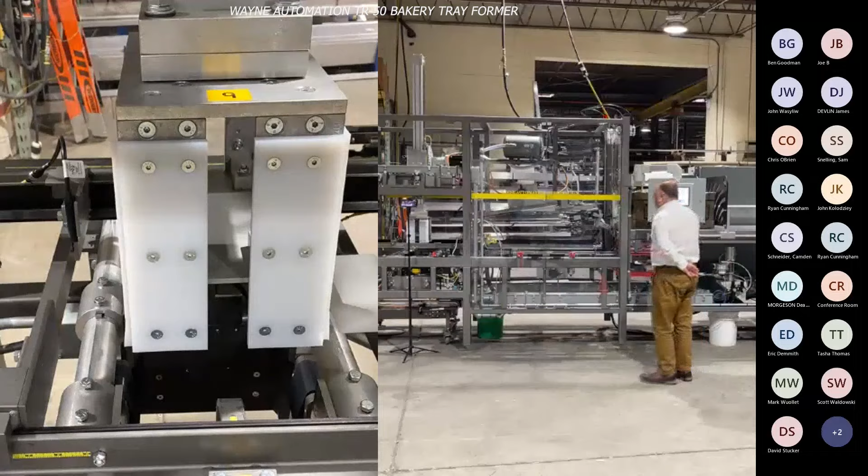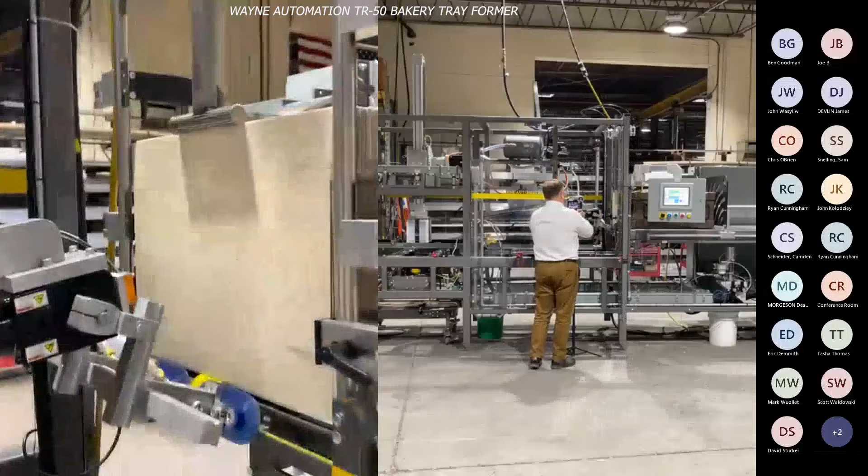Now let me stop for a minute and go through some more details of the machine. I'll talk you through the mechanics, then we'll get into the running operation a little more, and after that we can give you a static tour of the electricals and aspects like that. You'll see me moving my view around so you get a better understanding of the equipment.

To the side here that I'm pointing by the HMI is the magazine for the equipment. The magazine holds about 8 feet of blank stacked behind a pressure plate. I'll move over so we can see that in a little more detail.

So here is our magazine. This magazine indexes paper forward with each successive pick, and this pressure plate walks along with the paper on the afterward belt that the paper sits on. As we go to pick the paper, it comes to the front side of the magazine inside the machine, and you see the paper presented to the front magazine gate.

The static gates sense for the paper size and are picked by our servo linear and rotational pick system. This mechanism both travels in a linear fashion as well as a rotation to give a good, reliable pick of the paper and present it to the rest of the machine.

After we pick, we deliver it to our transport section. We have a servo linear transporter that will push the paper past the glue heads under these yellow rollers so that we can apply our adhesive precisely and accurately. With the dual adhesive we are applying here, precision is of the utmost importance - precision of the hot melt stripe, precision of the cold glue stripe - so that there is no squeeze out beyond the targeted areas, so that we have a good adhesive bond to allow that tray to survive in the oven.

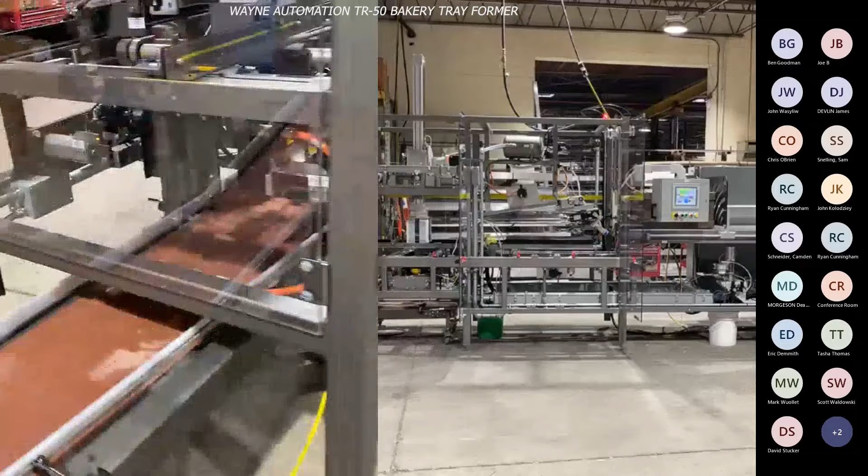When that's completed, we discharge out of the end of the machine onto our powered conveyor belt, taking the tray away up to your next activity.

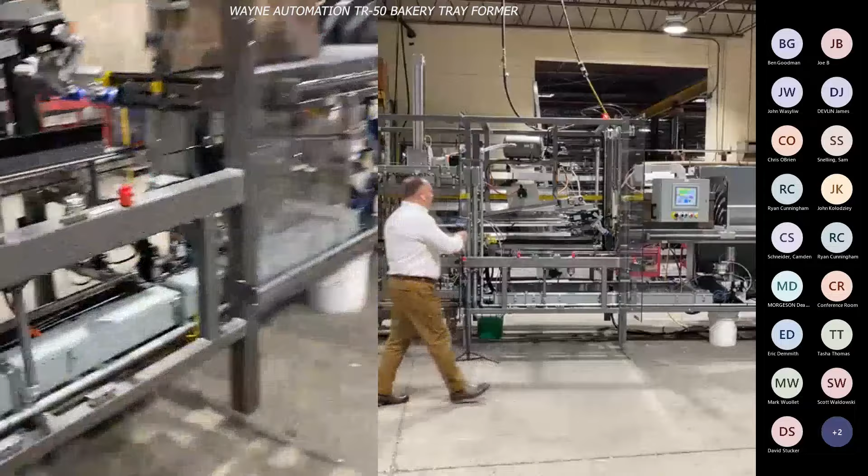I'm going to start the machine back up, and I'll just move through these various functions of the machine again so that we can see and watch what is happening.

Now, you see me running with the guard doors open. We've disabled some of those safety features for today for clarity of view while we're here demonstrating in our shop. Obviously, in any installed environment, that would not happen.

I'm going to re-energize the machine and reset. Our vacuum pump turns on, our hot melt adhesive system turns on, and we can begin producing.

Now here, for clarity of the demonstration, we are picking and operating at 15 trays per minute. Microsoft Teams doesn't have a frame rate that supports a very high-speed demo, so for clarity, we are running it very slowly for your viewing. We'll do a little speed demonstration a little bit later on.

So here you see our pick mechanism picking and taking the blank from the magazine. Now you see that blank being delivered to our servo linear transporter. We deliver the blank between our guide rails, and our servo transporter pusher escorts the paper in and past the glue head.

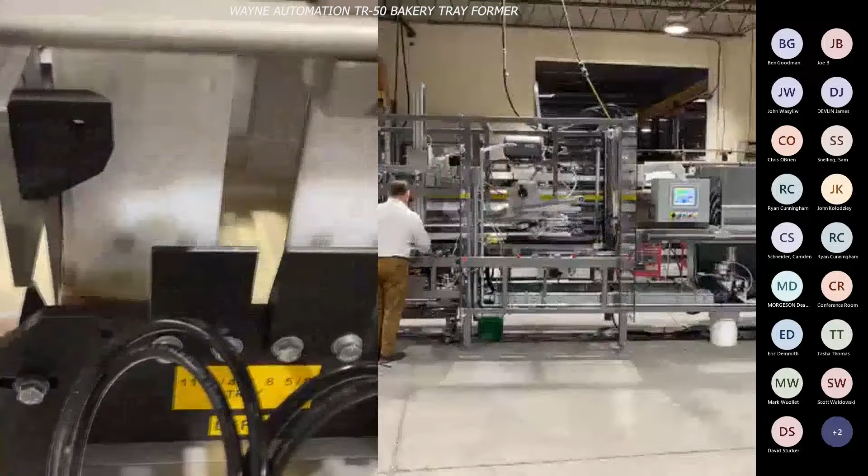I'll now slide around to the end where you can see the discharge. So trays drop down out of the forming section and onto our conveyor.

Jay, stay put for a second. It was kind of pixelated at the exit. Sure thing, I will stay right there.

Hopefully that's cleared up a little bit. Yeah, okay, a little bit better. I think it's clear enough, though.

Now, to show you a little bit better what that cold adhesive application and hot melt adhesive application looks like, I'm going to stop the machine through an e-stop at the forming section here, so you can see what a delivered tray looks like as it comes into the forming to see the glue stripes that are applied.

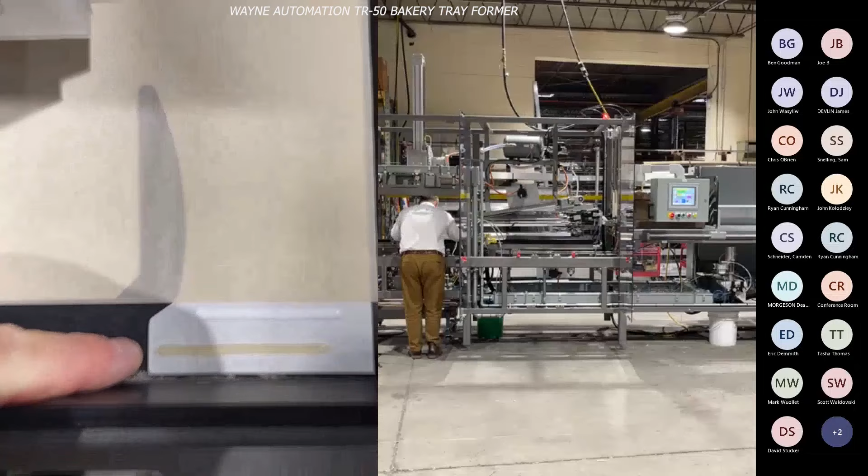So I've now initiated an e-stop of the machine. With this purpose, now I can get in nice and close and show you a tray delivered to the forming section. Here you see the hot melt adhesive stripe and the cold set adhesive inboard. The hot melt is there, again, purely to hold the tray formed until the cold set adhesive fully cures. And there you can see it as well on the downstream stripe.

Looking across to the other side of the piece of paper, you can see the same on the far side.

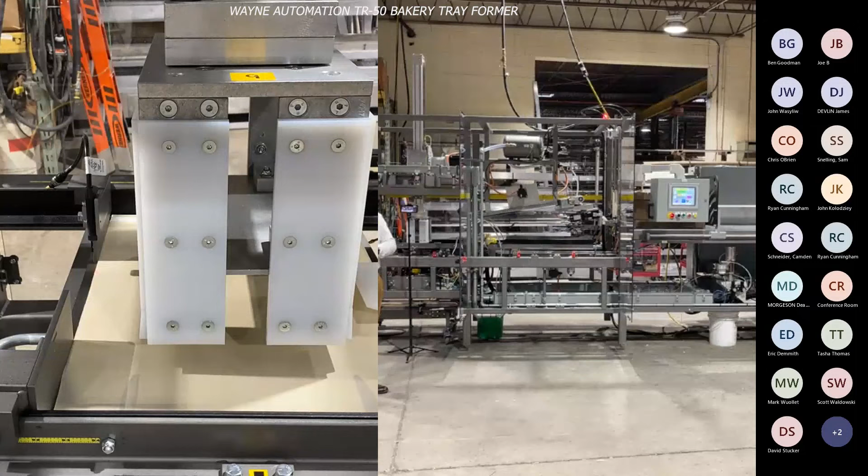Now, to achieve the precision we need at the production rates required for this machine, we have a Valco hot melt adhesive and Valco cold adhesive dispense system, all fired with a solenoid actuated, electrically opened, electrically closed gun. Those guns are fired off of the servo position of our transporter, giving us extreme accuracy, consistency, and repeatability in the placement of our adhesive, so that every tray comes out formed, ready, bonded, ready for transit into your oven.

I'm going to take a moment now and just give you an overall tour around the machine and show you some more details.

So starting at the magazine end of the machine, and I might disappear out of the overall view, but I am down at the magazine end.

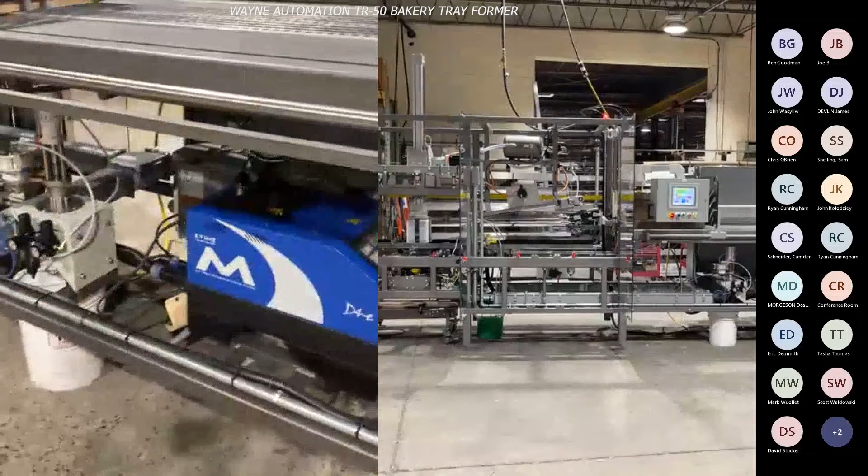What you see underneath the magazine is our Valco Melton hot melt adhesive tank system. This is a gear pump driven system for heating the Bostik adhesive at a very low relative temperature. We keep that tank at about 275 degrees. Low adhesive temp makes the product handle extremely well and provides extreme durability in the storage of that material.

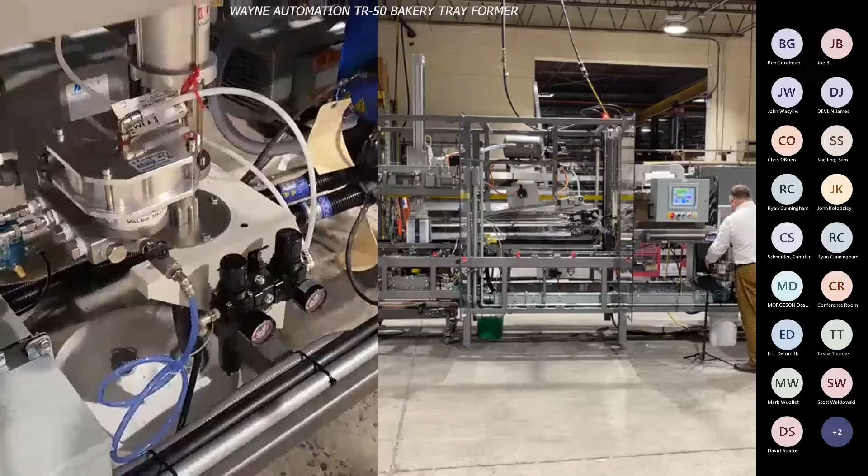Next to the hot melt adhesive pump is our cold adhesive dispense system, also a Valco Melton system. This cold adhesive pump system is pulling cold set adhesive from a pump bucket down below that you can see here. We're using a 5-gallon pail for this demonstration. That could easily be put into a 55-gallon drum of adhesive or a 500-gallon Gaylord, whatever suits your operational needs.

As we walk further down the machine, the operator screen, I'll spend a moment here touching on that and showing you what that operator station looks like.

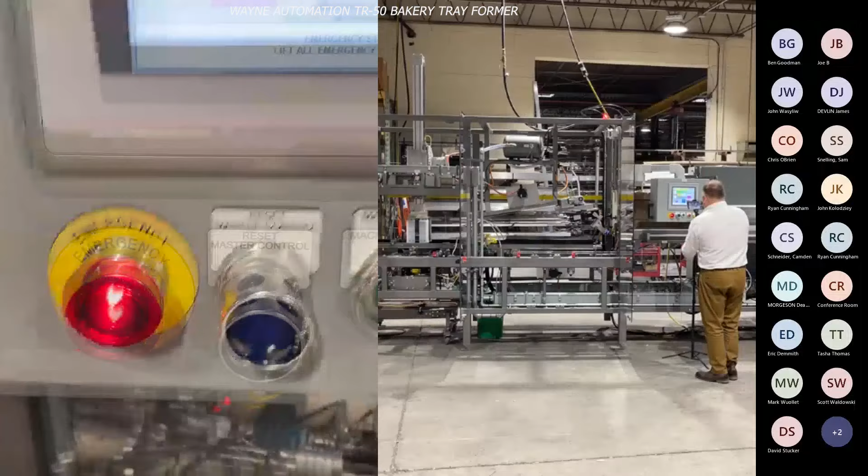The HMI is an Allen Bradley PanelView 10-inch HMI. I think I've got a good view there. Ben, is that coming across reasonably clear? Yeah, it is. Good.

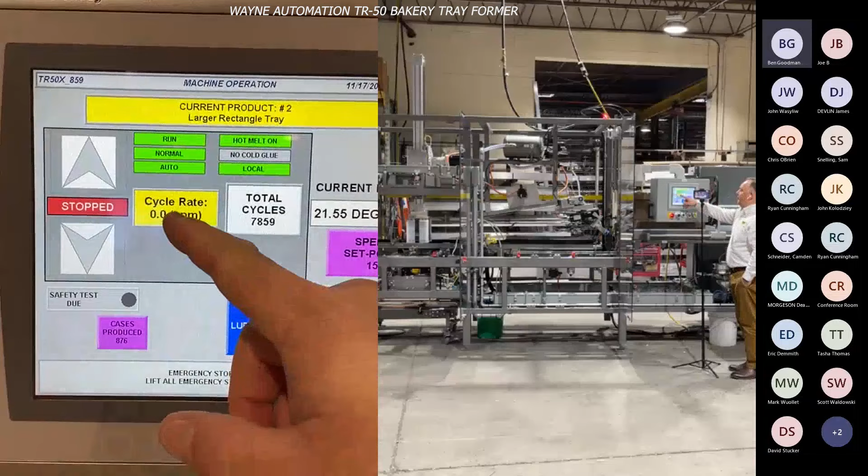The HMI shows the current set speed of the machine and then its current operating speed. In green or gray are the run modes of the machine. When all are green, the machine is ready to go into full production. When any one of these modes is grayed out, it's a non-production mode. You'll notice for the moment I turned the cold glue off, just so we don't have an alarm that goes off that warns you the cold glue is sitting. I'll go into that in a little more detail in a moment.

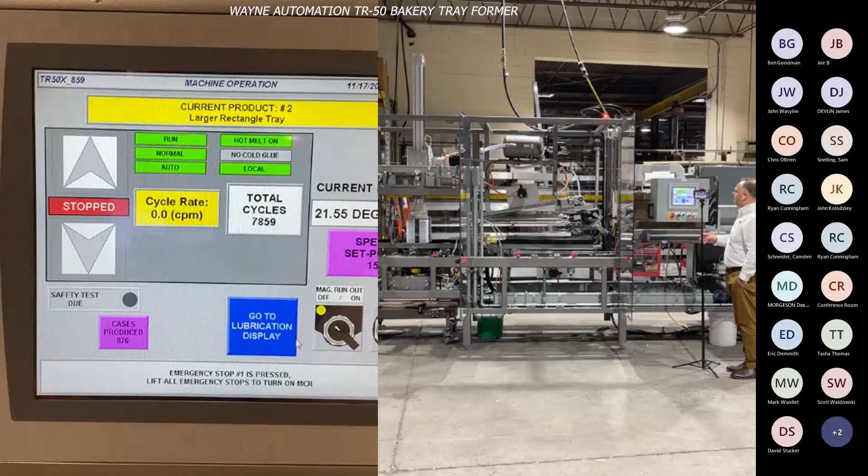We have the speed status of the machine. This is a continuously variable speed machine. You can dial in a speed, whatever position or rate you want, and the machine will, on the fly, dynamically accelerate or decelerate while maintaining full production. We'll do a little more of that as we get further into the demonstration.

I'm going to go around to the backside and show you a little bit of the electrical cabinet. So I'm going to disappear from the main overall view and pop around to our main electrical cabinet.

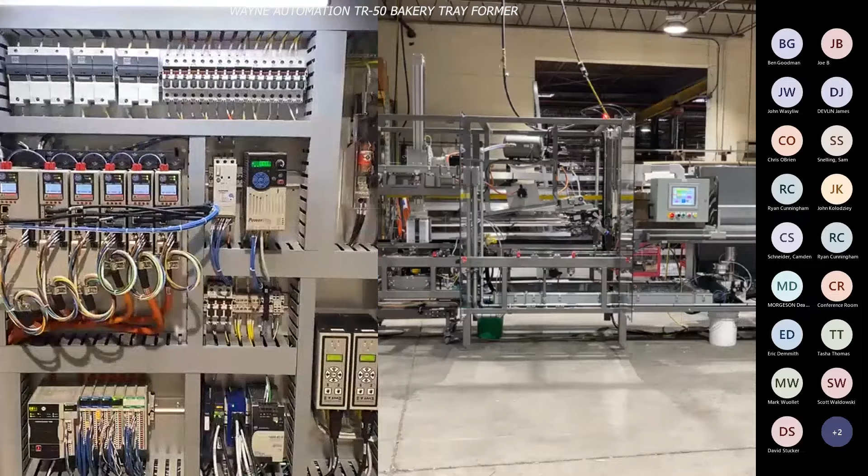On the far side of the machine here, if I can get back far enough, I'll prop that door open. In the main electrical cabinet, we have mixed voltage of high and low voltage—apologize for that. We have a mixed voltage 480 volt cabinet. High voltage is to the top of the cabinet; lower voltage control power is down to the bottom end of the cabinet.

Just to the right of the electrical controls enclosure is our hot melt disconnect. It's an option available on the equipment that allows, when de-energizing the main electrical enclosure, you can keep the hot melt system energized and active so you're not losing temperature in the tank, allowing you to recover and restart properly. I'll go a little closer in on the cabinet to show you some of the details.

Providing the main control to the machine is a set of Allen Bradley Kinetix 5500 series servos. Next to it, controlling the discharge conveyor, is an Ethernet-enabled Allen Bradley PowerFlex 525 variable frequency drive.

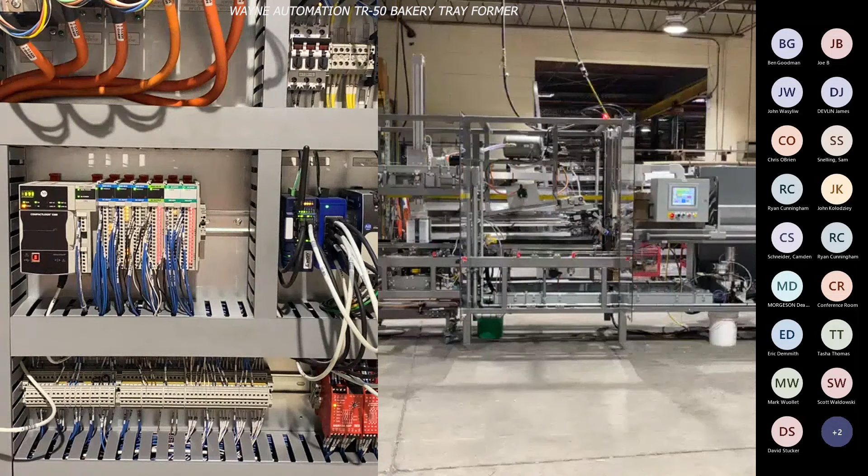While we cannot solve every potential issue you might occur, even when a service visit is required that requires boots on the ground, by doing pre-diagnostic work through this VPN point, we can maximize the effectiveness and timeliness of that service to get you the support you need should the situation arise.

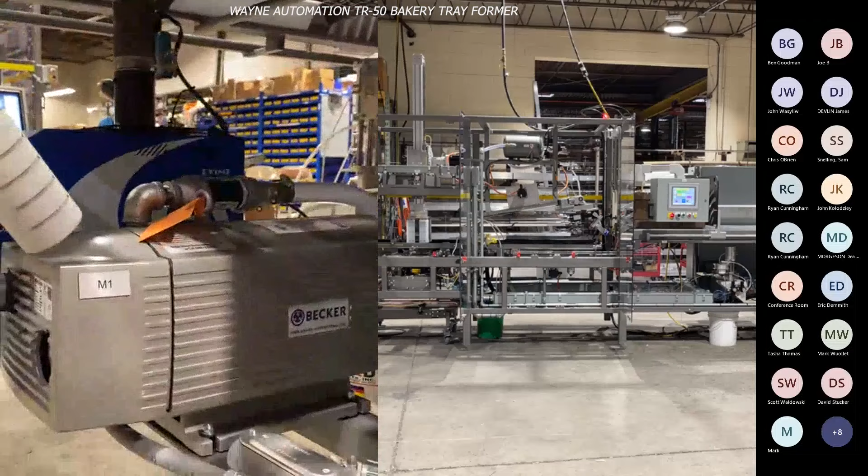That pump is protected by built-in filtration down at the end of the magazine, shown here with an easily inspectable, easily serviced high-end canister filter.

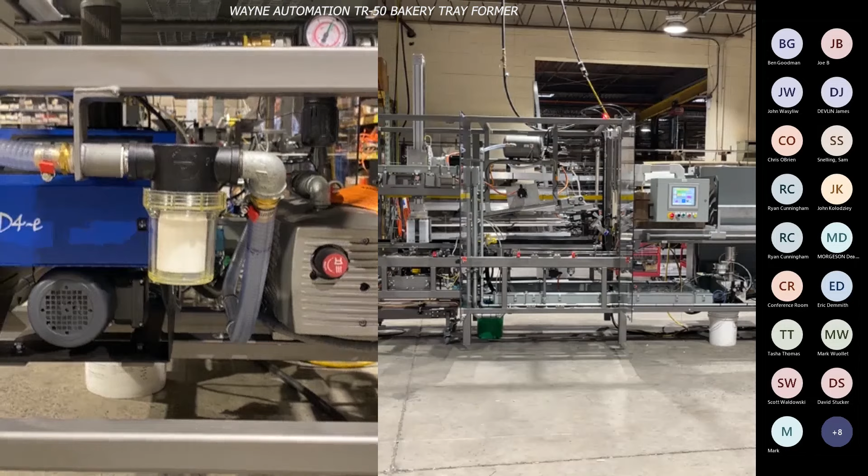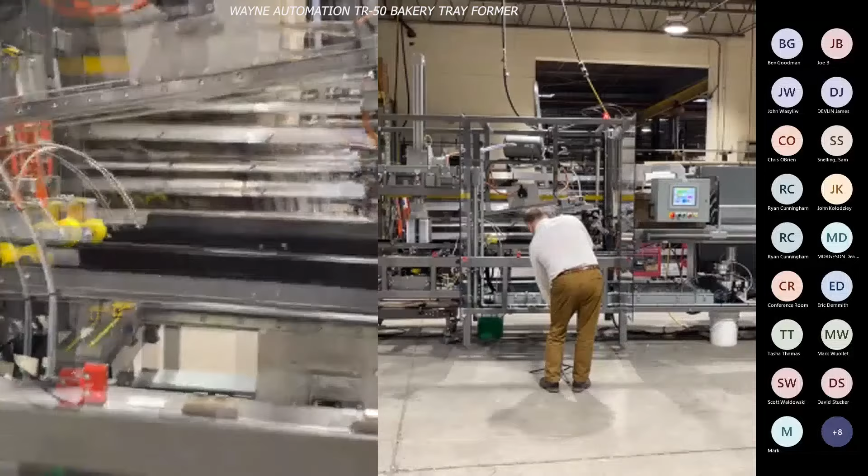Now, many of our applications will require more than one size of tray. This machine is designed for a wide range of sizes, from small to large. When a changeover is required, we have a range of scaled adjustments, marked and numbered, and provided on a setup sheet.

I'm highlighting a few of these scaled adjustments here. There is no adjustment made in the routine usage of the machine that is not scaled and numbered for repeatable, accurate changeovers.

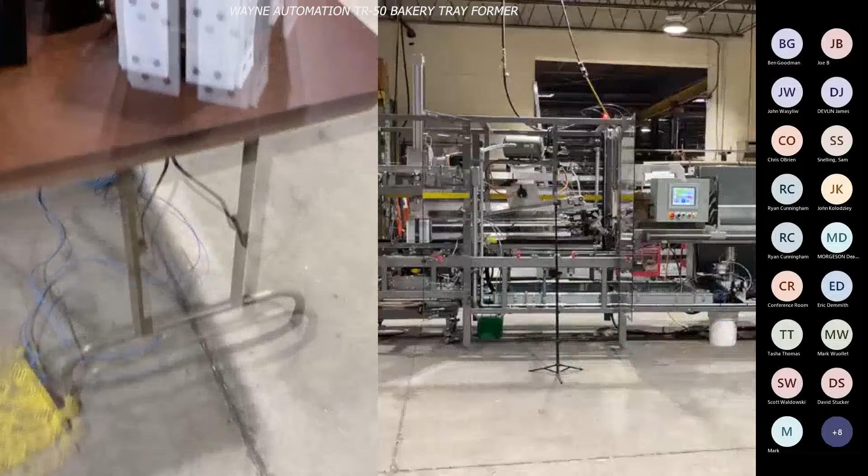However, to complete a changeover and run a different format tray, we have quick change removable tooling. Shown here on the table is a quick change mandrel that can be exchanged in and out of the machine for different footprint sizes of tray.

In addition, we have a pair of quick change compression plates that squeeze the tray shut to provide the best possible glue draw.

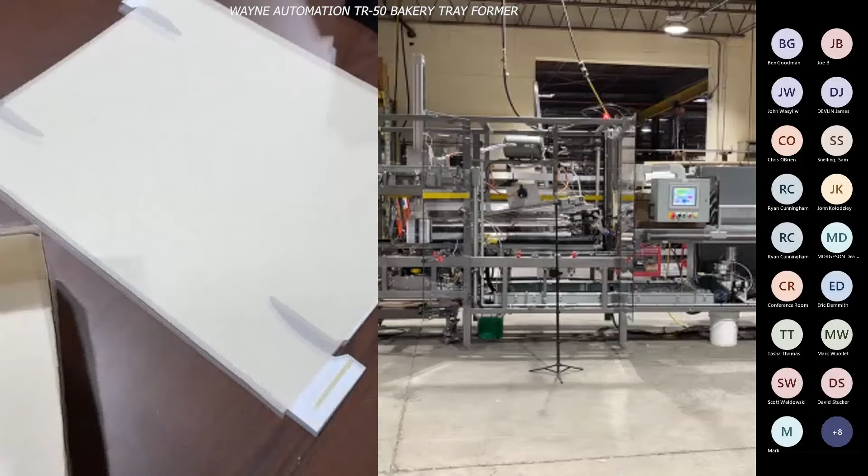Here also on the table is a close-up of the innovative fiber corner lock tray presented here. This one was glued a little while ago, so the cold set adhesive has now begun to cure and go clear.

Next to it here is a finished product tray.

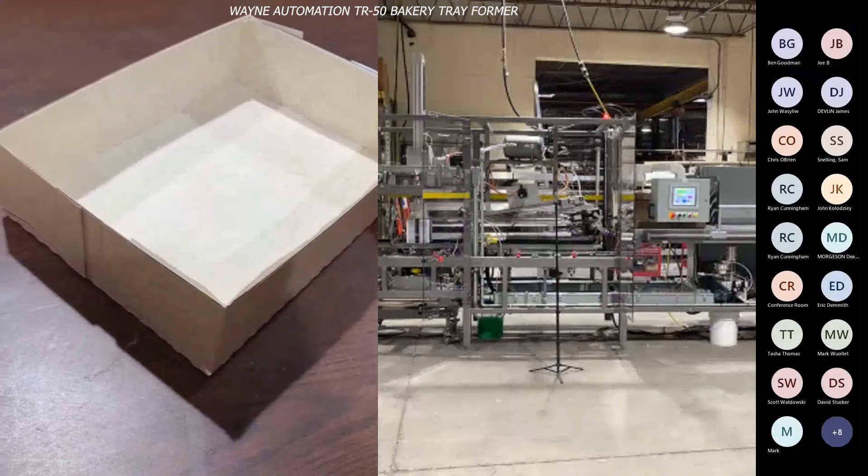The quality attributes we're looking for here on this tray that we can provide consistently and accurately are very accurate square flaps, providing nice, accurate 90-degree sidewalls as this tray application requires. As we look inside the tray, we see nice folded corners so that your product in the tray has good, consistent, accurate shape, what you desire.

So with this tray material, with our machine, with the Bostik cold adhesives, we have the ability to provide a very consistent, repeatable, and accurate watertight tray that is leak-proof and meets your needs over and over again.

Hopefully that was instructive.

And I see that there was a question: what about trays without a 90-degree angle? That's a good question. We have designed this machine to do draft wall trays at varying angles, whatever innovative fiber can produce. So this machine here will run with a setup and changeover, a 9-degree, 11-degree, 13-degree wall tray, whatever is needed, all with just a different set of change tooling specific to that product size.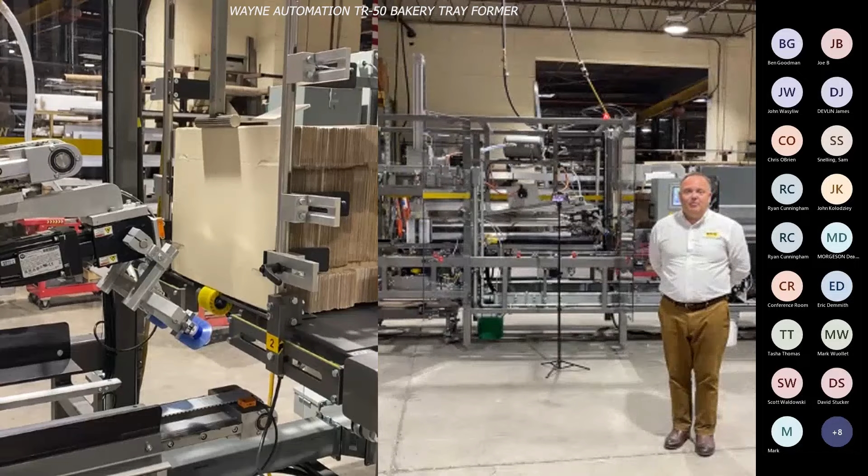Hopefully that answers your question.

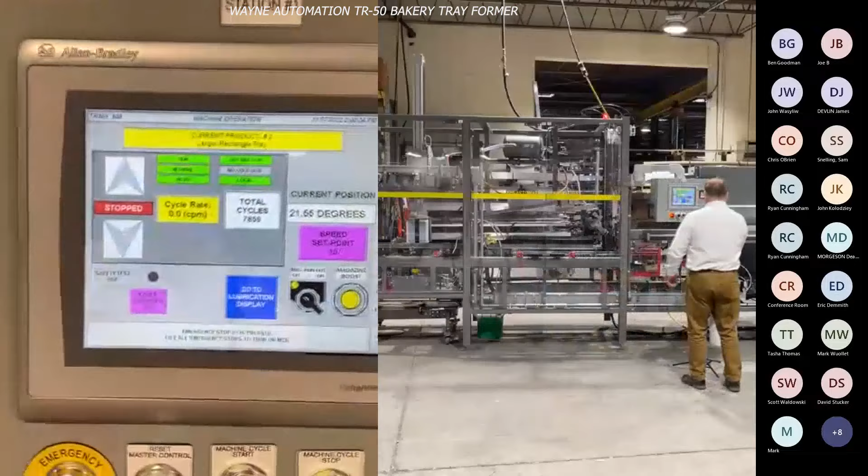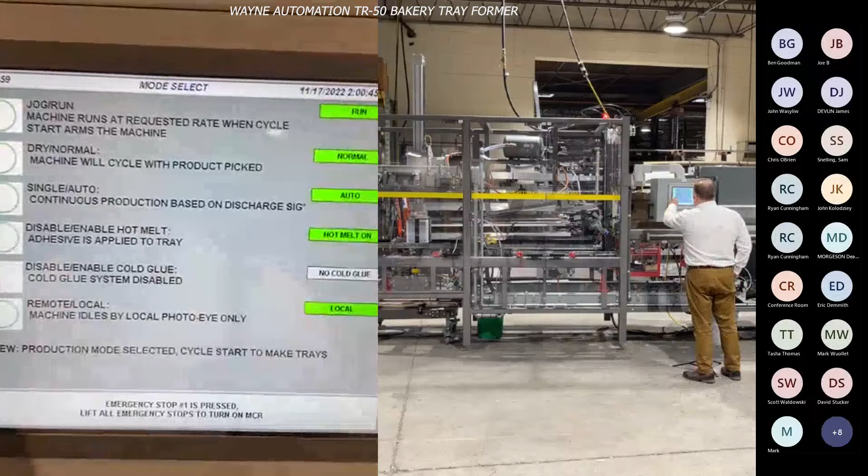I'm going to resume running the machine again and place my camera for a nice view. Actually, I'm going to focus on the HMI and show you this as we run. I'll demonstrate the variable speed nature of the machine and how easy it is to change your production speed, either through an HMI selection or through line controls, whatever you need. I'm going to go through my mode selection and turn my cold adhesive product back on.

Go to my operator screen, and we see a set point of 15 a minute. Our current run rate is 0, obviously. The banner at the bottom is calling for me to do a machine reset, which I'll initiate now.

Now, in the overall view, you may or may not be able to perceive some of the speed differences, but I'll show you how we change speed. So now you see the machine is at run speed, cycling at 15 a minute, which is its set point. If our application requires additional speed, I can simply press 20, and we'll see the machine accelerate up to 20 cases a minute production.

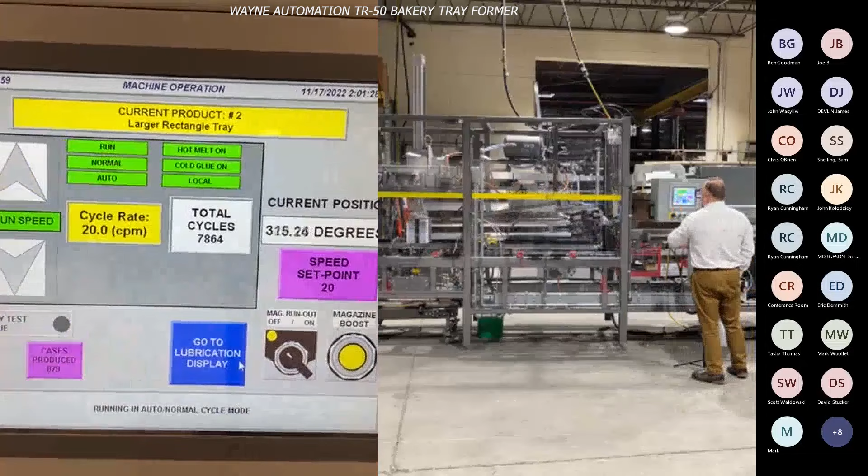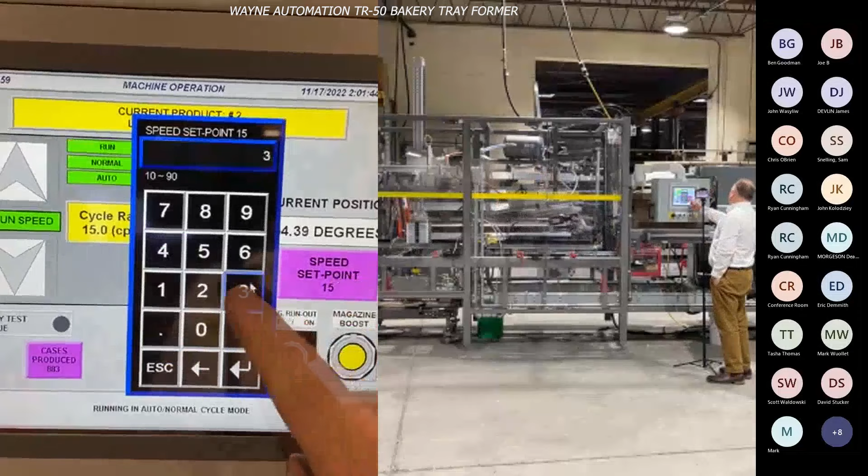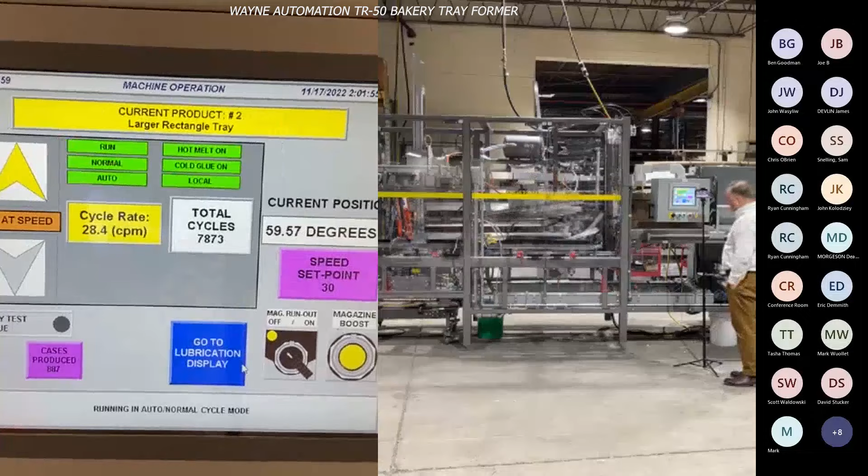If I then wish to slow back down, it's as simple as re-entering a new speed. I wish to run double this speed, so I simply enter it, and in a couple of seconds the machine will accelerate up to the set point. Now running here at 30 cases a minute, and hopefully that's coming across reasonably smoothly on the HMI.

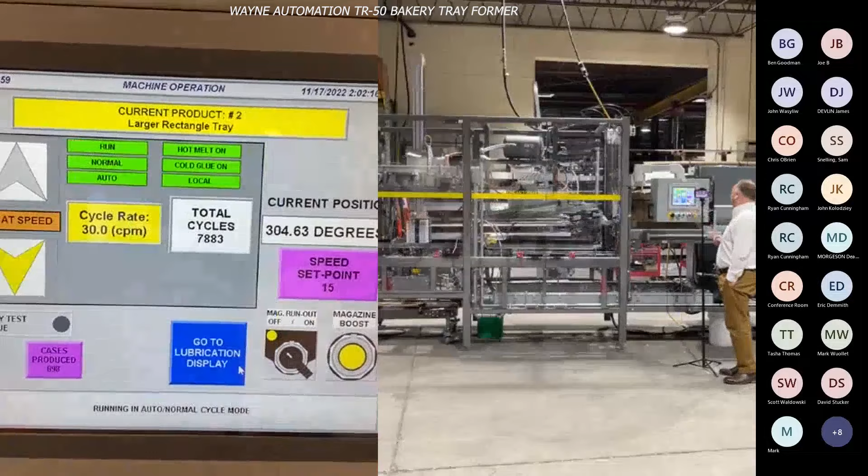So continuously variable speed allows us to accommodate your production needs with minimal accumulation, whatever that would be. And then to slow back down is as simple as pressing in a number. There's no pause in the production, no loss of cases. We can just continue to produce, albeit at different rates, and that's through the full servo application of this machine.

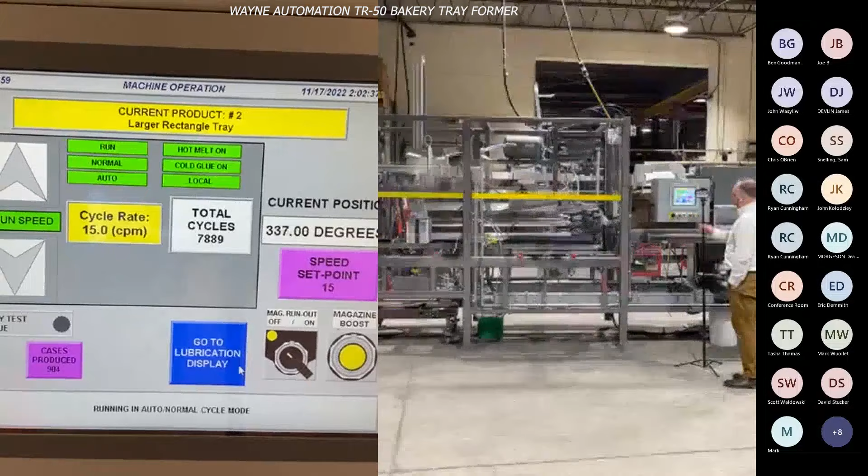Now, in a real-world line control setting, I'm going to demonstrate what if your line backs up, what if you don't have a need for more trays. My helper here is going to simulate a line backup. We have a downstream photo eye mounted on our conveyor for this demonstration, blocking the eye. The machine goes into a dry cycle, so it's now no longer producing cases, cycling at the desired rate, albeit with no products.

It's allowed to stay in this position for a set amount of time, in this case 1 minute for this demonstration. The machine will say, you have ignored me, I'm going to initiate an automatic stop. We'll stop producing product altogether and stop the motion altogether.

We'll let that come to a stop here as we demonstrate that, and then show you how the machine, when the downstream line is cleared, will automatically resume full production. That's a user settable parameter. So the machine has now stopped. It is still in a production run state, however it is not producing.

Chris, if you'd allow that to clear now. The line condition is cleared. The machine enunciates a restart, and again immediately resumes back into its automated production, producing trays at the desired set rate.

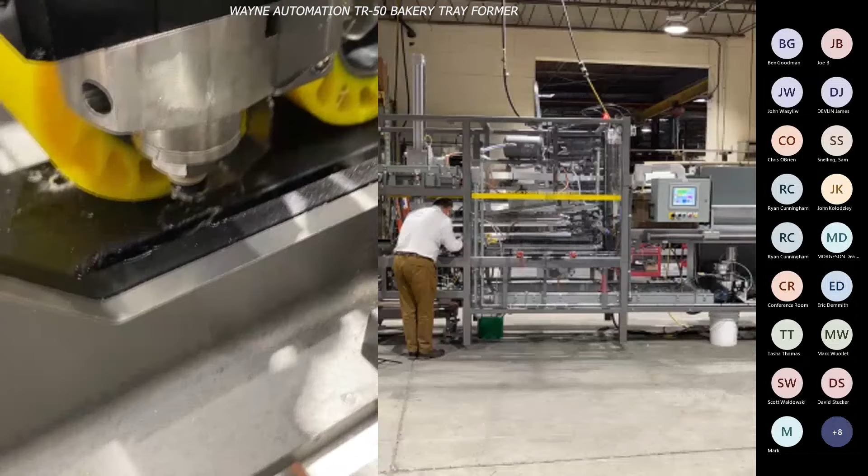Protecting each of our cold adhesive heads is an actuated tip cover that, when the machine is in production, draws back. When the machine is idled or stopped, it closes and protects the tip of the cold adhesive applicator from skimming over and affecting the quality of the stripe application of the glue.

Further, to prevent the cold glue system from hardening and becoming unreliable, the machine has an alarm banner that will enunciate after a short amount of time. Anytime the cold glue system on the machine has been primed and activated, we are waiting on a timer to either have the machine operate and dispense cold glue, or be purged and flushed of the cold adhesive.

So if your operations team at the end of the day hits stop, walks away to do their cleanup tasks, and ignores the cold glue system, the machine will alarm and enunciate, drawing attention to the fact that the cold glue system needs to be properly decommissioned if it's not going to be used.

To facilitate that at the end of a shift, we have an automated purging routine in the HMI that, by simply exchanging the cold adhesive for a source of fresh water, will run an automated 10+ minute purge to flush the cold adhesive system with water and dump it into a waiting drain bucket down below. That way, the machine will not have adhesive in the system, and it will not cure, dry, and potentially damage the system. It will be left in a ready state to be primed for the next production operation.

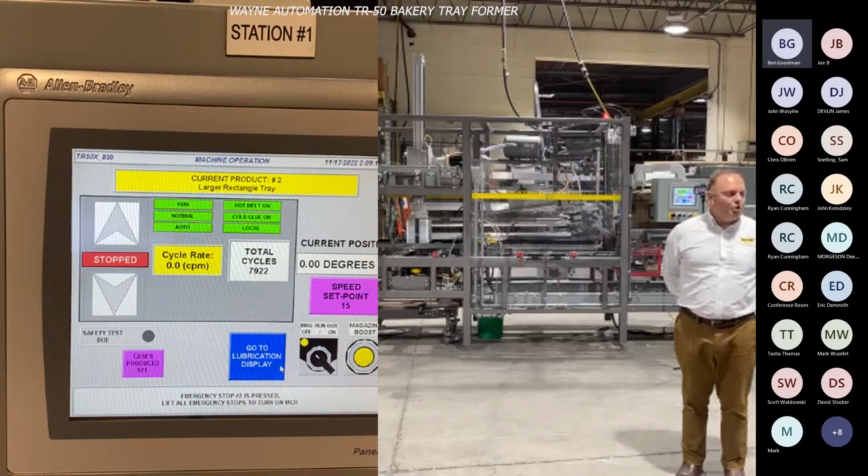We do have a question related to changeover from one format to another - what should a customer expect for time-wise? That's a good question. With a trained operations staff that our field technicians will train during startup, we would expect changeover to be approximately 15 minutes - one lap around the machine touching all the changeover points.

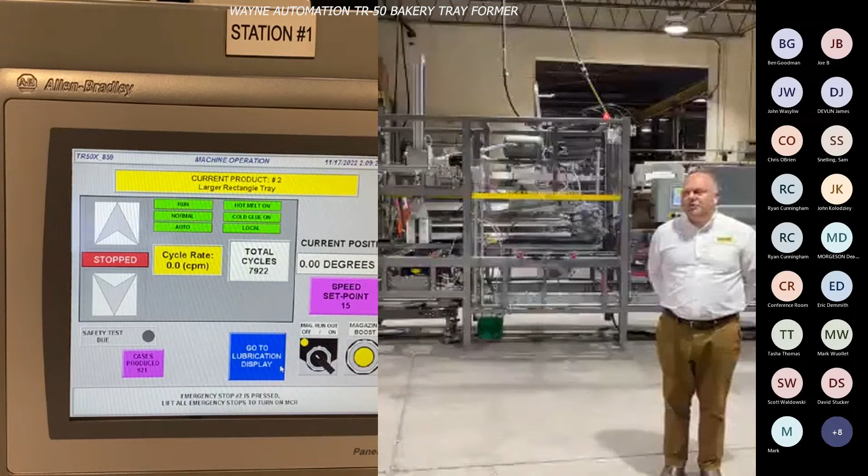Now, some customers have asked, can it be less? Can it be more? Any tray that has the same base footprint, as shown here, any tray that's the same interior length and width would only require a subset of the change points, as the mandrel will remain the same regardless of the footprint size.

Simply a wall height change requires an adjustment to two rail points as well as the magazine, so it could be much less. If the overall size footprint of the tray changes, that would require changing the mandrel and the compression plates using those quick change tools that I showed you aside, and that would represent a typical 15-minute changeover.

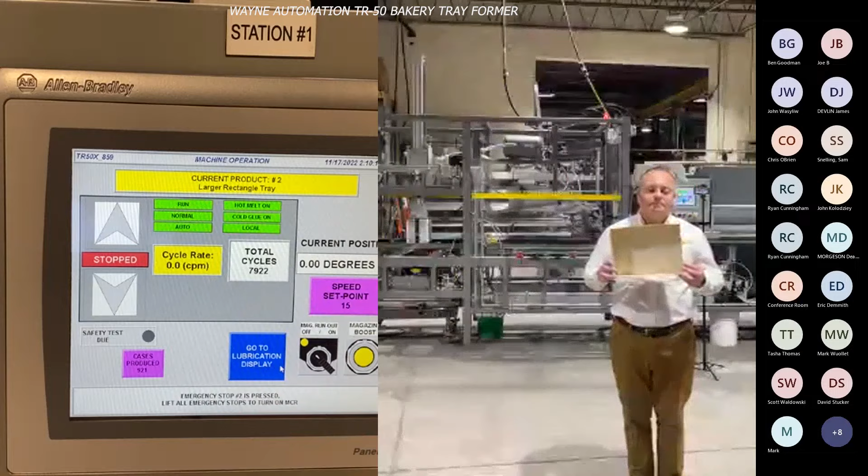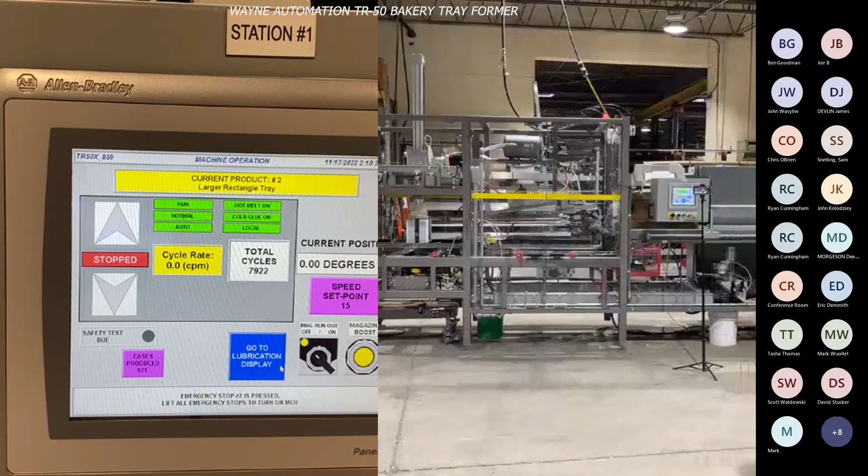How often should you clean the glue heads? It's a great question. The hot melt system we run at very low temperatures, at the lower end of what Bostik recommends for the adhesives, so that we minimize the potential for any discoloration or other adverse effects on the glue. Routine glue system maintenance is required and is estimated to be done on a monthly or semi-monthly basis.

The cold adhesive system must be purged at the end of every usage to operate and remain functional in the future, and thus must be primed at the beginning of each usage. We recommend on a monthly basis removing the cold glue nozzles and the actuators and giving them a thorough cleaning in warm water. Beyond that, the glue system maintenance on a routine basis is no more complex than that.

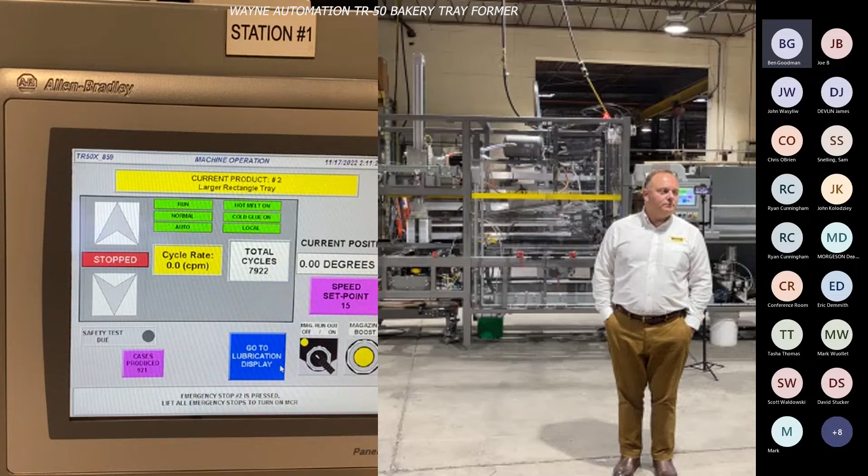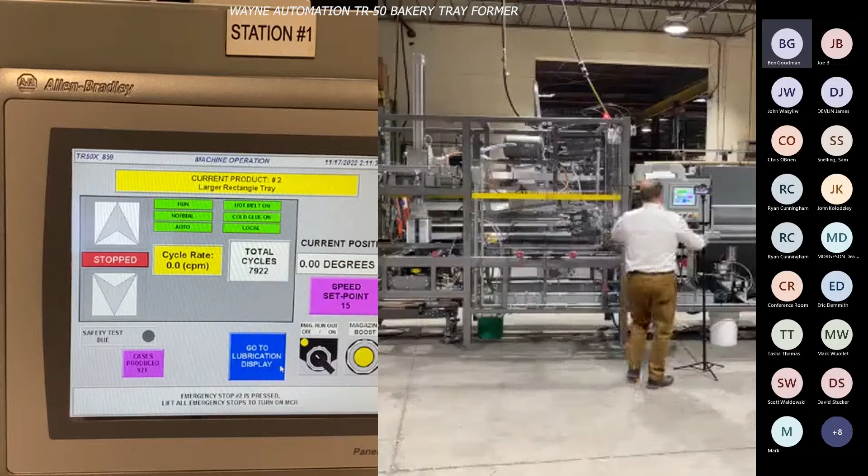I do have a question, and it's related generally to footprint. There was a question - currently our tray blanks are stacked horizontally in the magazine. To reduce footprint, could they be stacked vertically?

And I will follow up with that, because I know the answer, but is it possible to shorten the magazine?

Let me touch on why our magazine is horizontal and not vertical, like maybe you've seen in some other machines. In a vertical magazine that picks off the bottom of the stack, the weight of the paper is continuously variable based on how many sheets are left. You could have 5 sheets with very low weight, or a completely filled magazine with a lot of paper weight. That change in weight, and thus pressure against the magazine gates, reduces the consistency and reliability of magazine functions. At Wayne Automation, we don't feel that's an acceptable design compromise. So our magazines are horizontal, so the pressure against the paper and against the magazine gates is consistent whether it's 5 sheets, 50 sheets, or 500 sheets of paper.

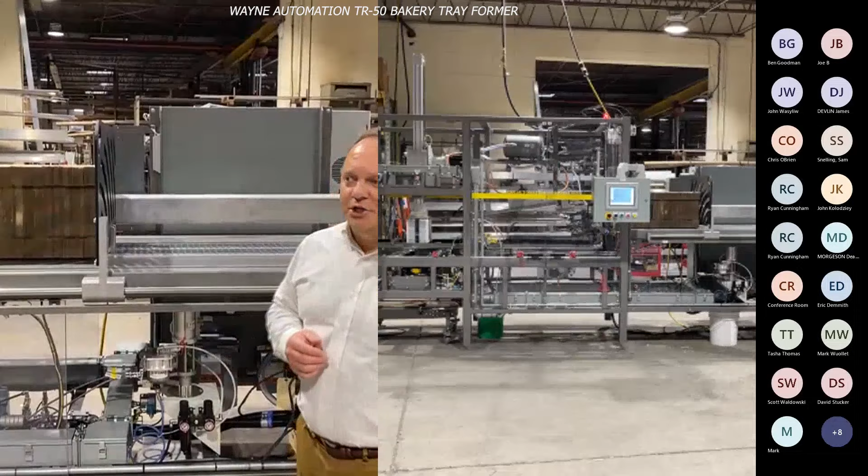Now, regarding the length of the magazine, it's offered at a standard length that holds approximately 1,000 plus pieces of paper in an E-flute configuration. While this is standard, if special applications are needed, we can always have an engineering discussion with the customer about what reduced-length magazine may or may not be accommodated. Hopefully that addresses the question.

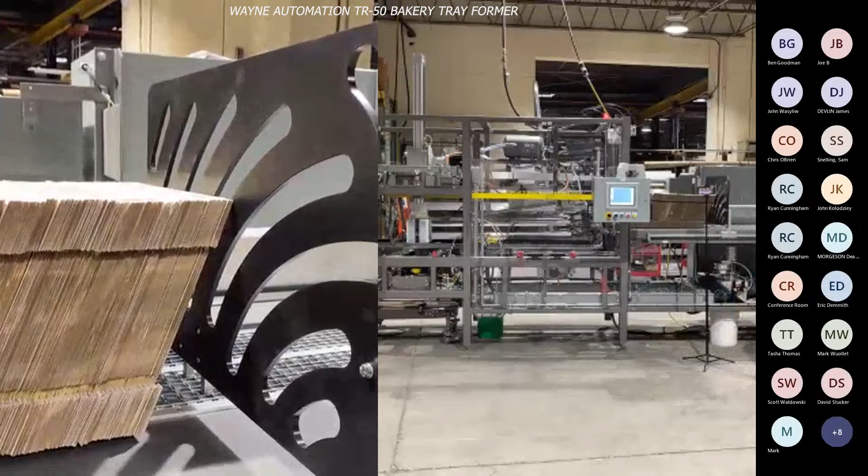The only situation that needs to be monitored from an operational standpoint is if you allow the paper at the front of the magazine to fall back. If you take the pressure plate, like I'm going to show here, and just let it fall back and leave it like that, the machine will work to overcome that lack of boost, but it could result in a potential mistake.

So when loading, when adding more paper, simply bring the pressure plate back behind the last sheet of paper, pull it reasonably close to the rest of the paper stack, and the machine will continue to boost this pressure plate forward with each individual cycle that it picks.

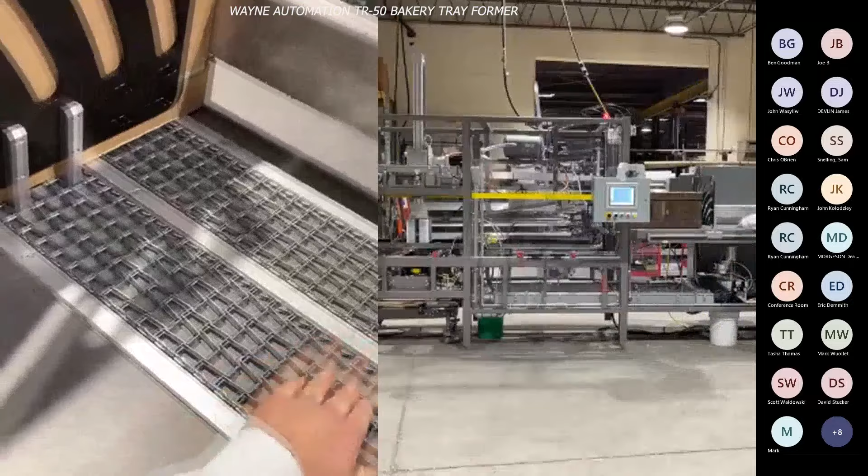That pressure plate is indexed forward, and the paper sits on these two Ashworth driven belts that are indexed forward incrementally with each pick.

Let me take another moment and give a better summation of the functions within our HMI, because if you cannot interact properly with the best running machine, then it becomes a challenge for your operation.

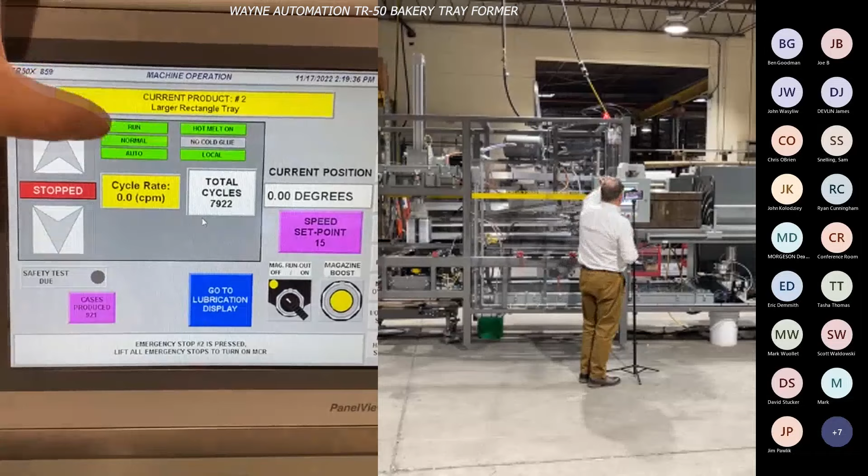So I'm going to walk through screens. I showed you the operator screen, which should be shown most of the time that you're running, showing current cycle rate, speed set point, current resettable case counter, and total machine cycle count, plus the summary status of the functions of the machine.

Now, if we want to change those functions, we have a screen that provides more detail. The machine has a number of different functions where you can go from run to jog mode. It can be used after a maintenance activity to verify things have been put back together correctly, or after a new setup to validate that adjustments have been made correctly, whatever is needed there.

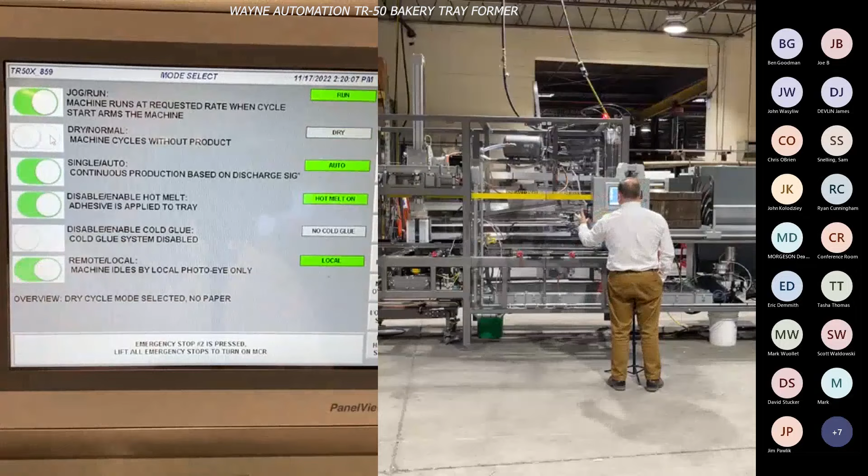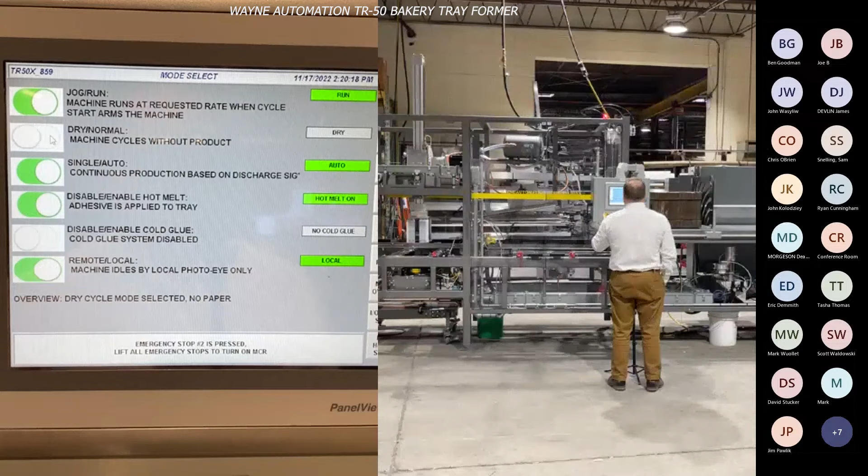We can put the machine in a dry or normal mode. Dry mode obviously does not take paper, but moves the functions of the machine. Again, this could be very useful after a maintenance activity to validate proper reassembly, or after an initial brand new setup.

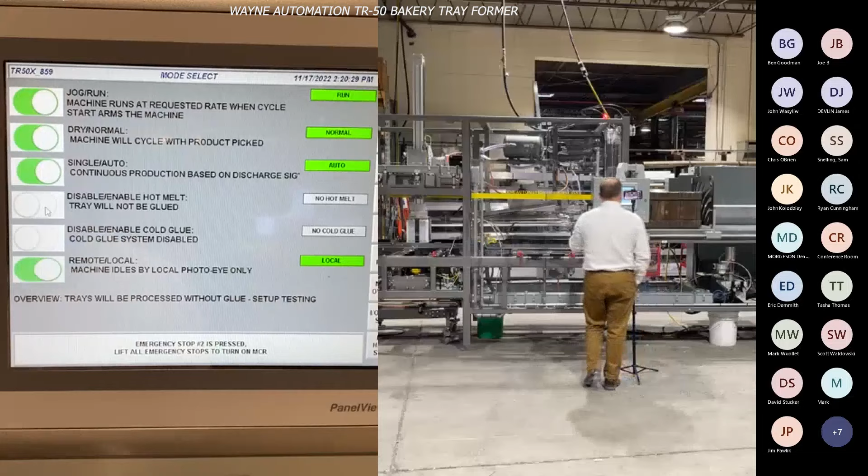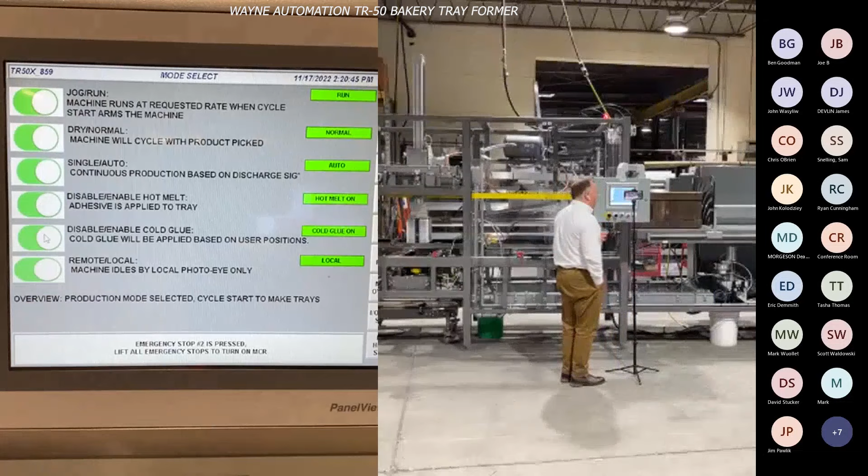We can disable or enable separately the hot melt and cold adhesives. That would only be a usable function in a maintenance action. If you are trying to run the machine without both adhesives activated, the machine will not permit you to run production. We also have a remote/local function, where if you so desire in your operation to control a remote line from a plant supervisory PLC, taking data back and forth from a SCADA system, we have that ability as well.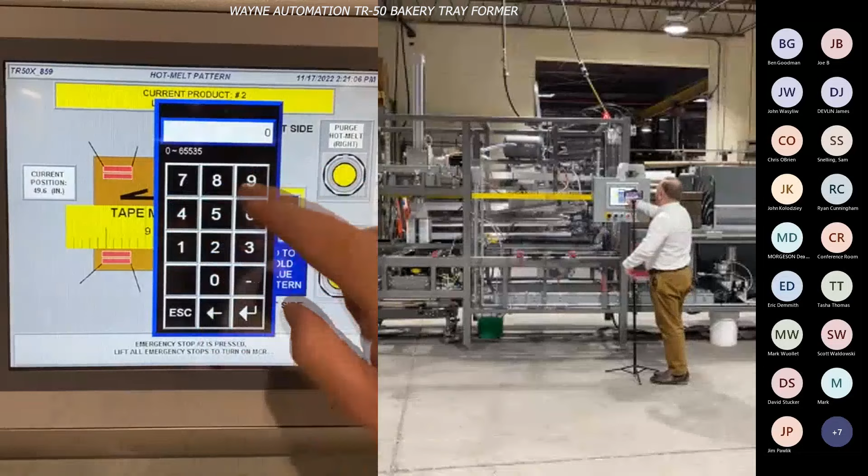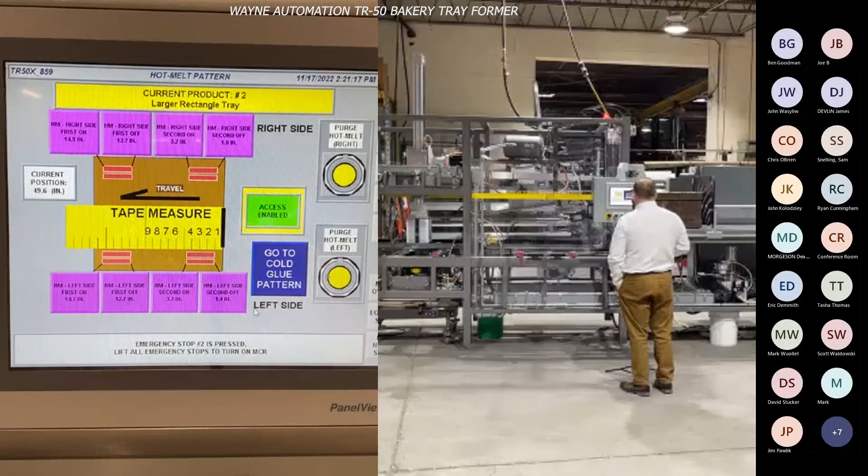In the glue pattern, we have extreme control over our products. We're looking here at the hot melt screen, and I'm going to enter a password. We have four corner flap positions with 1/10 of an inch positional accuracy in the length and placement of those glue stripes, allowing us to make tailored adjustments independent of each side of the tray as required to give you the optimum product.

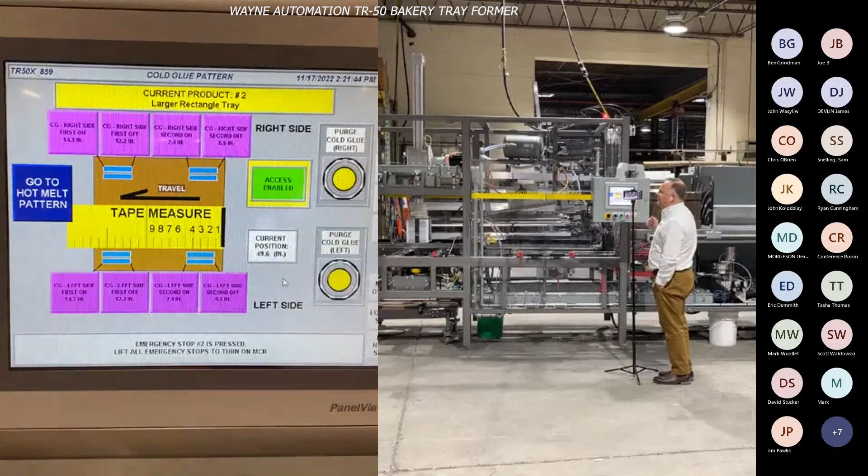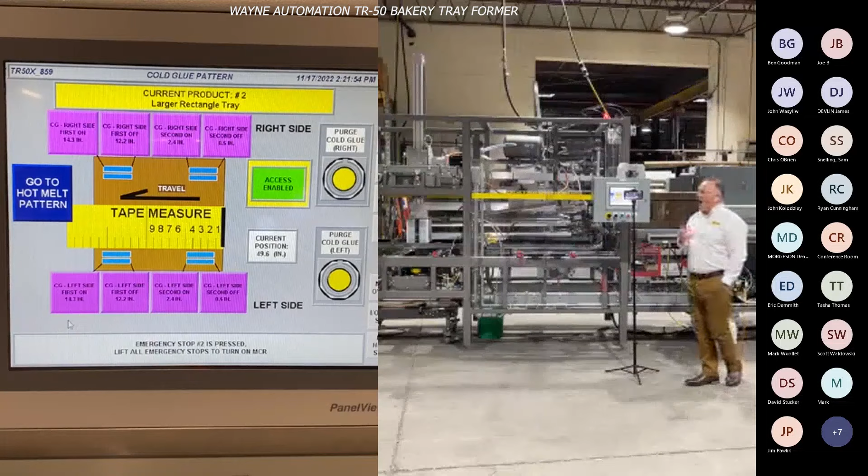Likewise, after servicing the glue system, we can independently purge the hot and cold, left and right guns as needed for whatever purpose you might have. We can also go to the cold glue system, which again has its own 1/10 decimal point accuracy position for each flap, left side and right side. So we have 100% complete control over where we apply both the hot and cold adhesives on each corner, each flap of the tray, allowing us to get an optimal bond line.

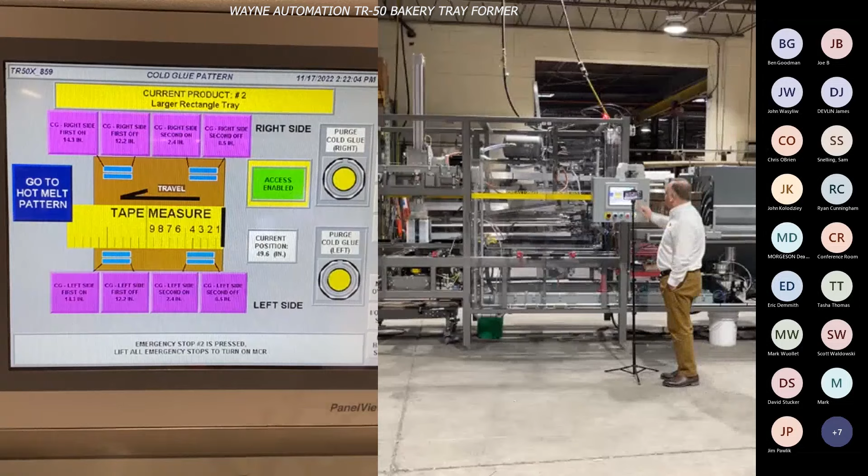We have a machine overview screen that shows the safety status of the machine. Now with our guard doors jumpered out, they're not annunciating, but it shows the current status of interlock of any e-stops or safety doors that may or may not be breached, rendering the system safe.

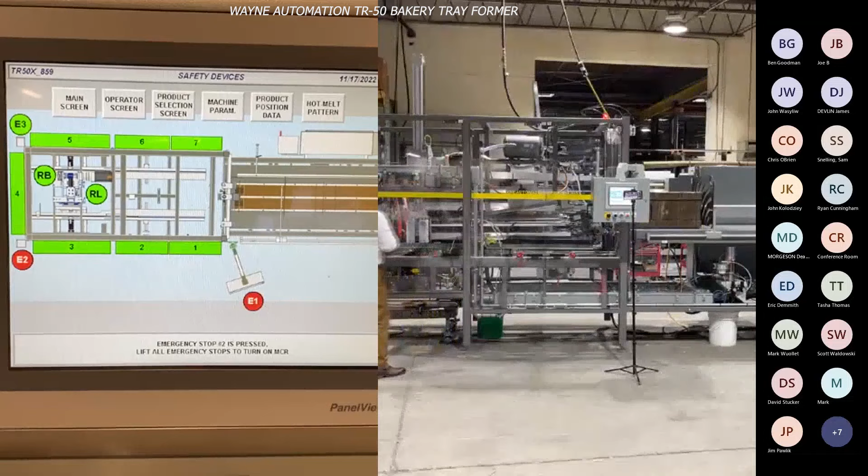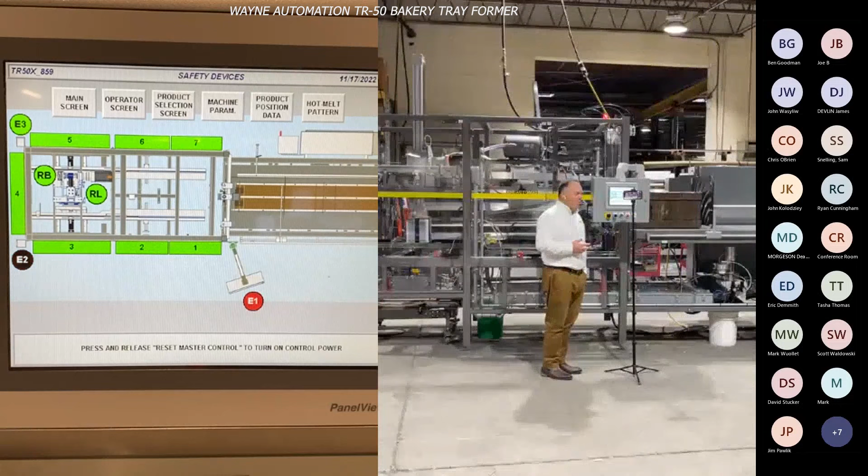The machine is produced standard from a safety standpoint as a Category 2 PLC rated machine. For customers who have higher required safety requirements, the machine can be upgraded to a Category 3 Performance Level D machine optionally as needed.

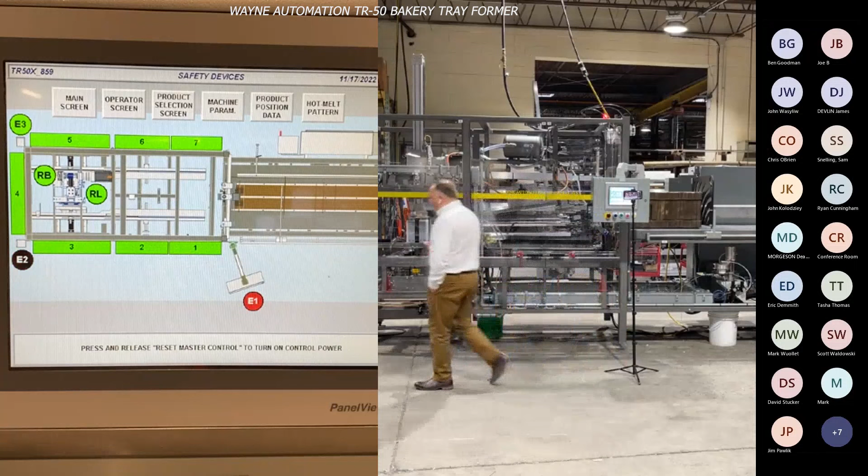Now, we've been talking about the machine, but I guess everyone's most interested in what a bond line of the tray looks like. I'm going to grab a couple trays here, come stand in front of it, and let's do this right here by the magazine so I can put one down.

So we're going to look here at the end of this tray. We see good square flaps. And let's look at the bond line. That's a pretty tight joint.

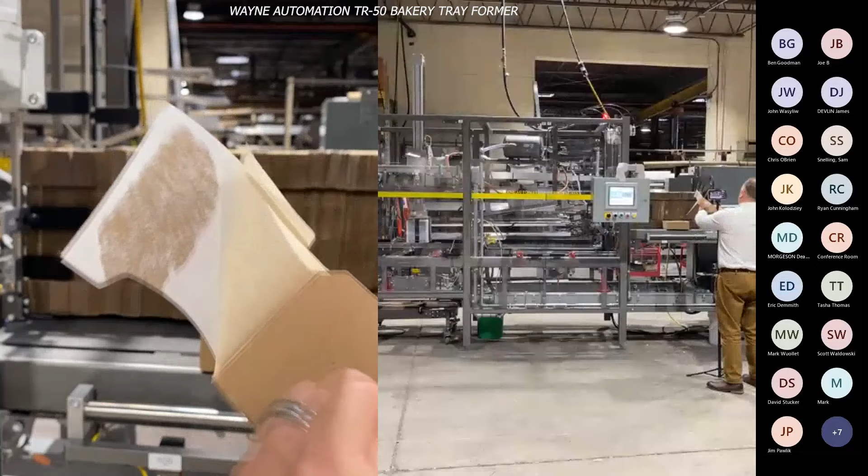So what we see here is substantial fiber tear in the joint. This was a tray we ran a couple minutes ago. As I try to peel that away and expose more, we get fiber tear on both sides. There we've gotten fiber tear, which disassembled the entire tray.

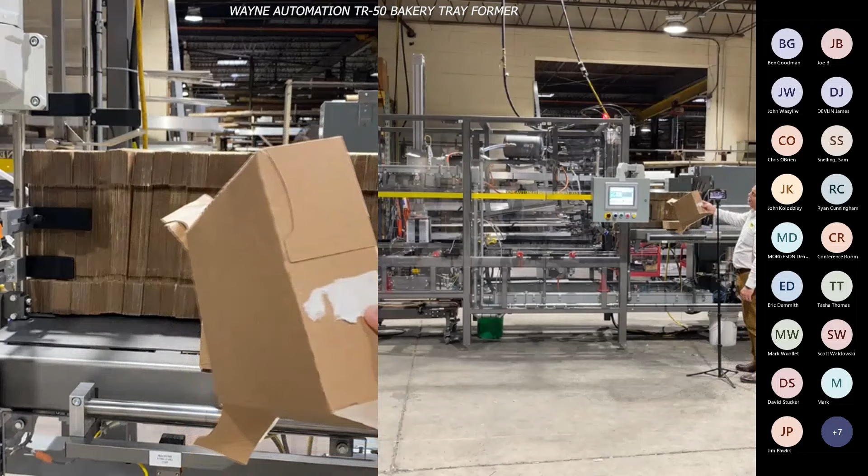So what you're seeing is a combination of the hot and cold adhesives providing a very strong bond line to the tray. Now, through our testing, what happens when you bake this tray is that the hot melt adhesive will soften and lose its grip on the paper. However, the cold white adhesive has cured and will provide an oven-proof bond line that will survive oven times and temperatures needed so that your product can come out looking proper, perfect every time.

So the subject tray I was showing you, when we talk about total adhesive consumption, in this tray, which is a 3-inch wall tray, we are consuming hot melt adhesive about a quarter of a cubic inch. So a very small amount of hot melt is holding the case together, and an equally small amount of cold adhesive. So your usage is very low, despite having an exceptionally strong bond line that is oven safe.